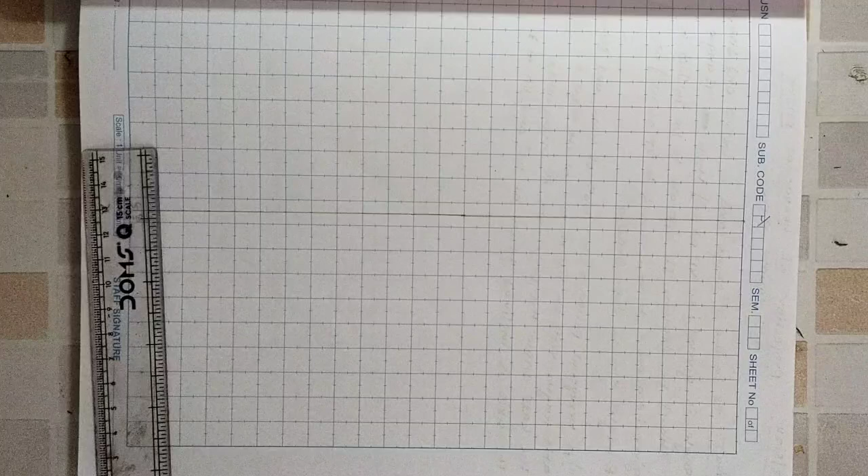So it's simple, first you have to draw a line, that is your baseline, it should be 25 mm. Let me draw it on this place, because I don't want to waste a lot of space. I got my line here properly, this is visible, right? So I'll make it dark.

Now you have to use the interior angle of the pentagon. From each corner you have to keep the protractor and take the interior angle, which is 108 degrees. Keep it properly and take 108 from this side and 108 from this side, then just draw a line. You don't have to pull a long line, just a little is enough.

Now take the compass, keep it like this, 25, perfect, cut here, cut here. Now you don't have to keep at this angle and measure 25 again, you simply bisect it like this. It's done.

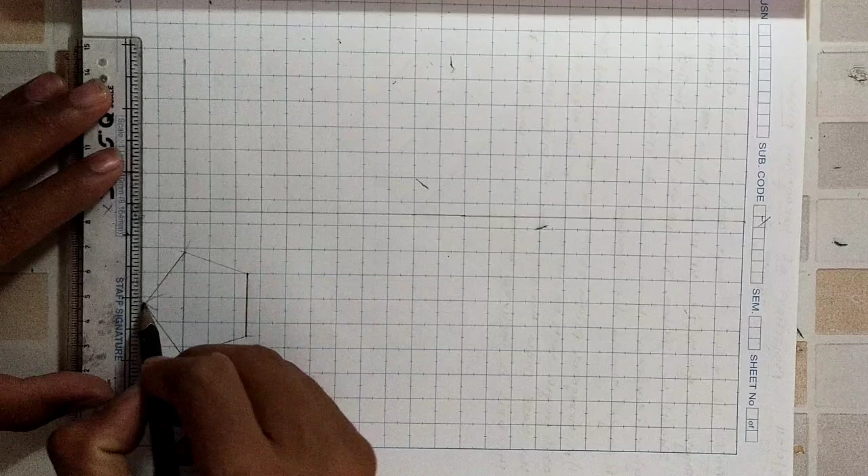See, all the lines should be straight. So from here we'll have, it's 60, right? So it will go till 1 2 3 4 5 6, till here. So this also came properly on this line itself, and this will get extended like this. This will be the top.

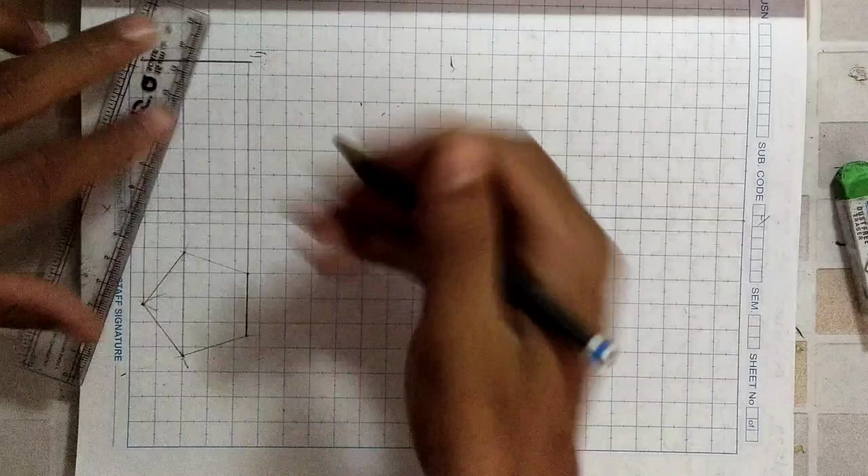This line will be dark because it's a visible edge. I won't be explaining all those things about which should be light, dark, or thin. I'll just say visible edges will be dark, edges which are not visible will be in dash-dash-dash line. This is just a projection line, it will be thin. These lines should be dark because they are visible, that's why.

Now let me start naming it. This will be A, in bracket A1, because it's a prism, so below there will be another edge. This I will keep as B and B1, C, C1. Don't name here because you have to take lines again like that, then you'll have to erase it again. A, B, C. This I will keep D, D1. This will be E, E1.

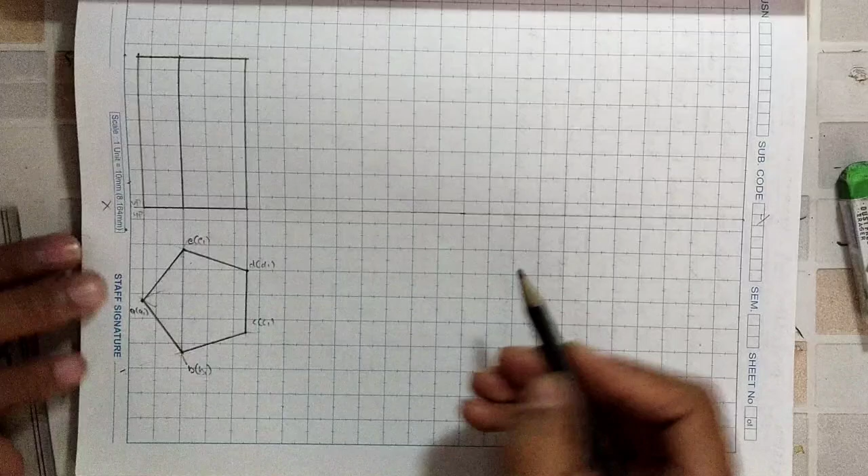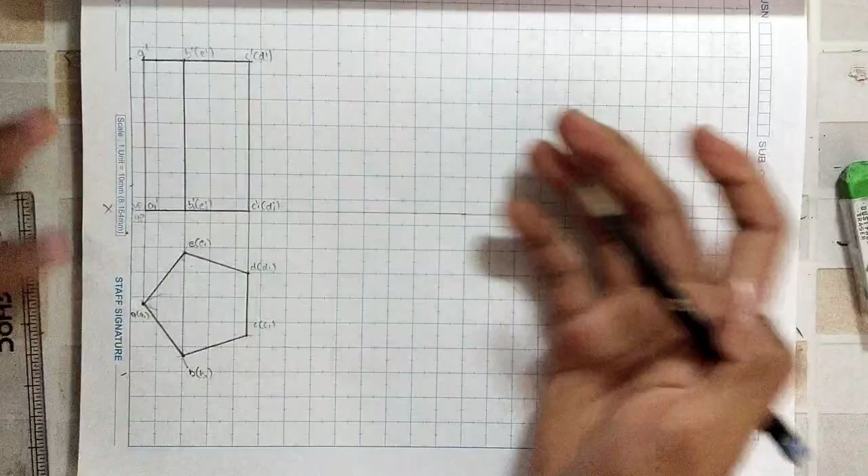So you have to place here, this is A1 dash. Above the line always dash will come, below the XY line there won't be dash. So this is my B dash, in bracket B1 dash, in bracket E1 dash, this and this edge. Here I have C dash, C1 dash, in bracket D1 dash. Here I have C dash, in bracket D dash, B dash, in bracket E dash, and here only A dash. So this part is done.

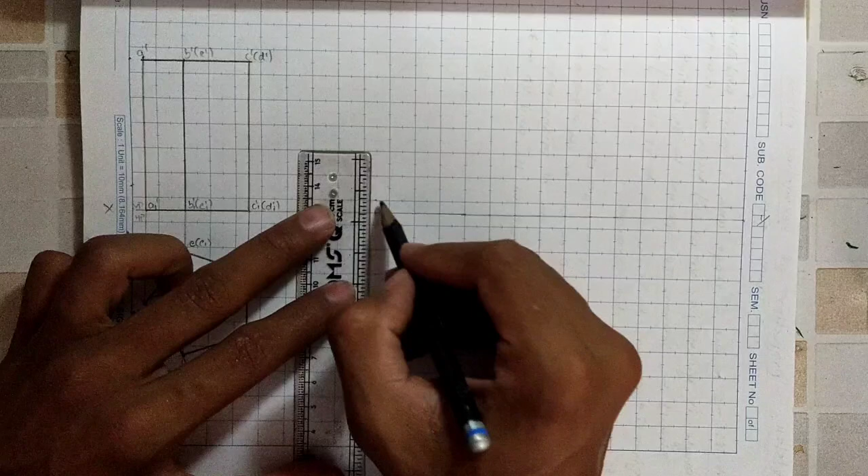Now what they said is it's inclined 40 degrees. Let us take this. I'll consider this, or let me take from here. If I put a line like this, I'll take 40 degree from here. Let me just sharpen my pencil.

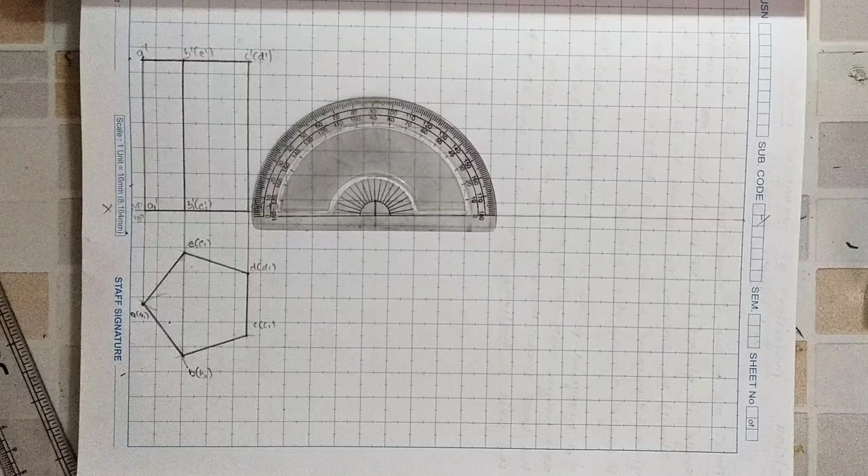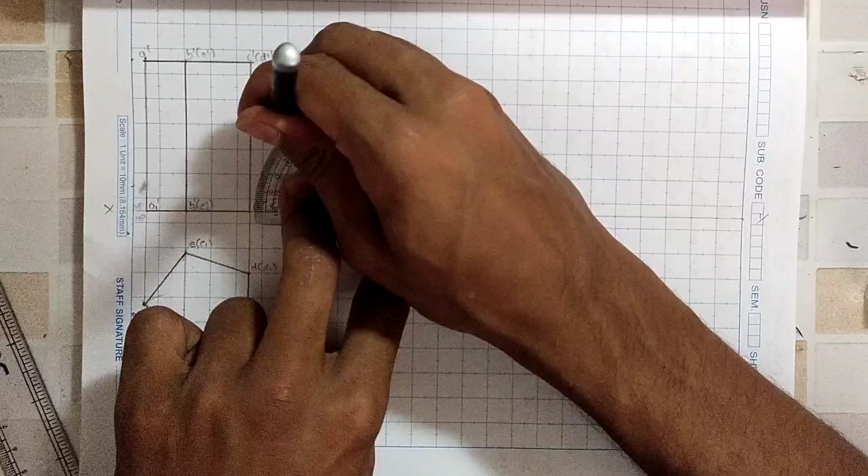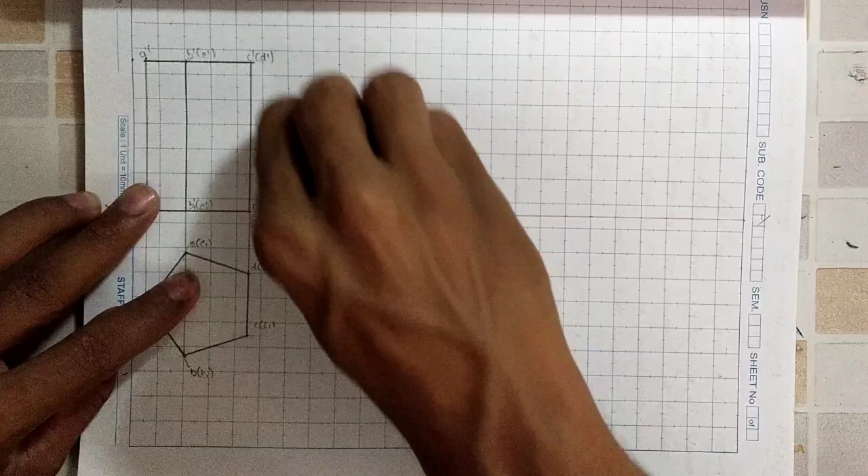Okay, so I'll keep it here at 40 degree. I'll put a thin line first. Now I'll measure this length and cut it from here. The excess I'll erase. So now this is the base which I need.

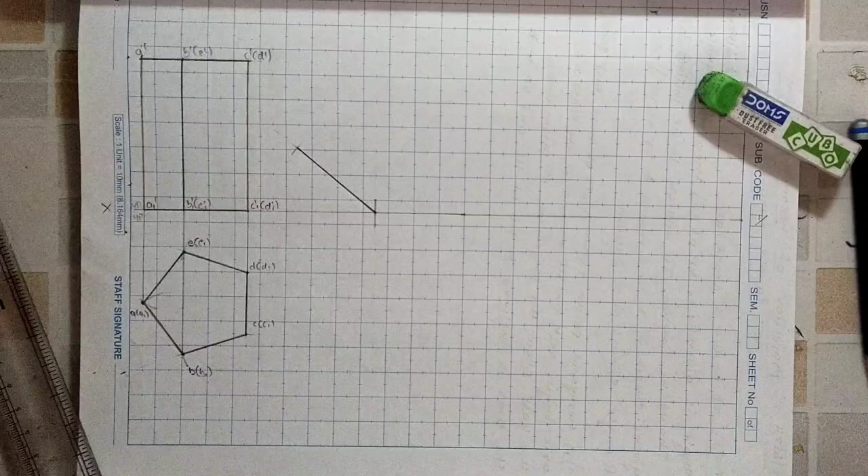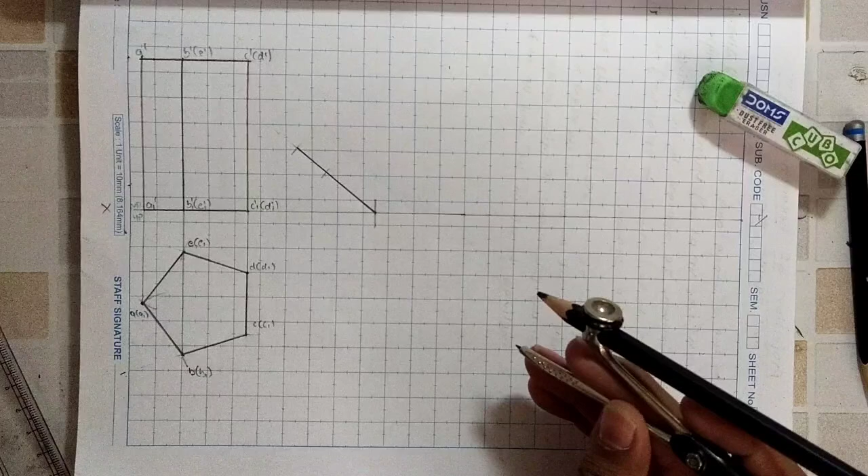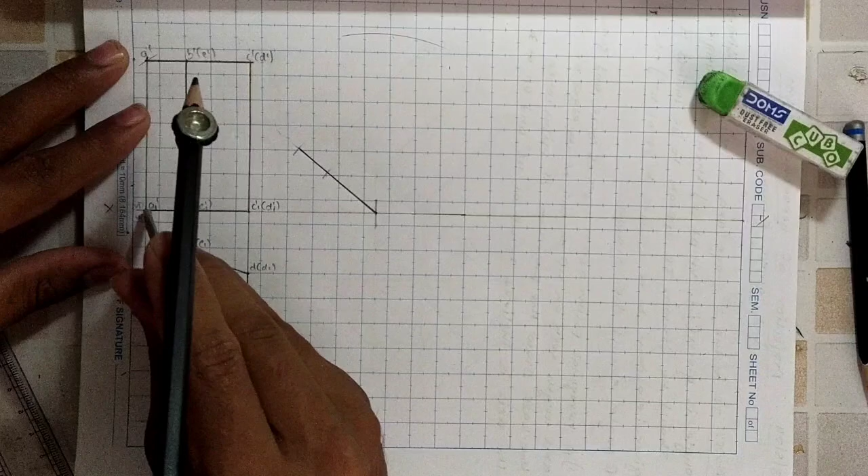Now I'll measure this and cut. Now from this point and this point I have to take 90 degrees. You can do that, or simply measure like this, put an arc like this, so this and this corner will be the same, right? And take this, put an arc like this. Coming correct, right? This is simple.

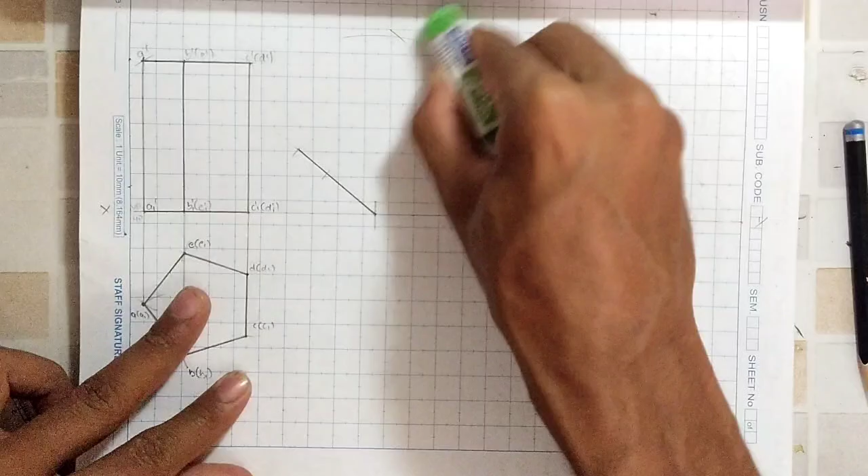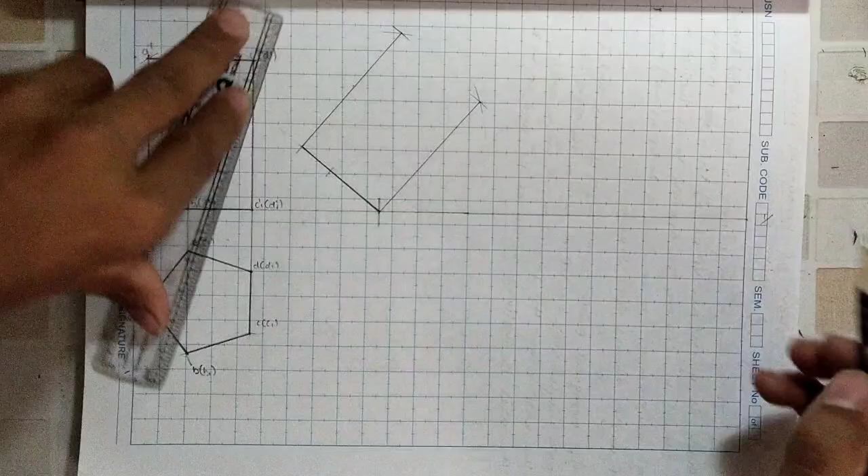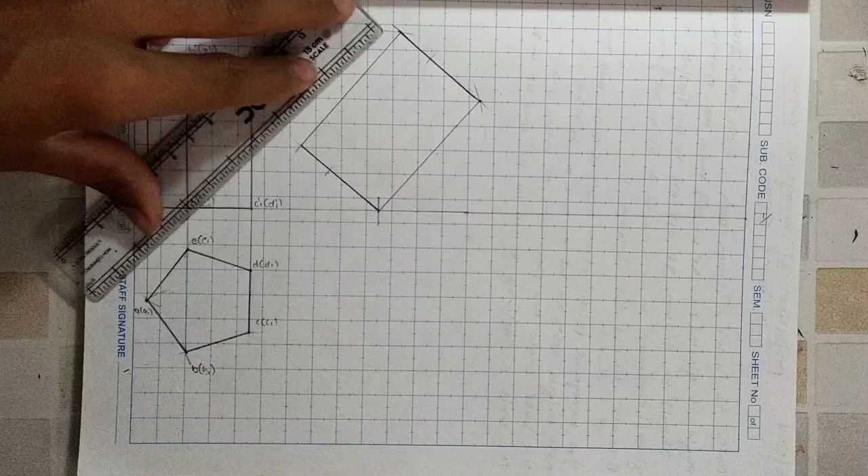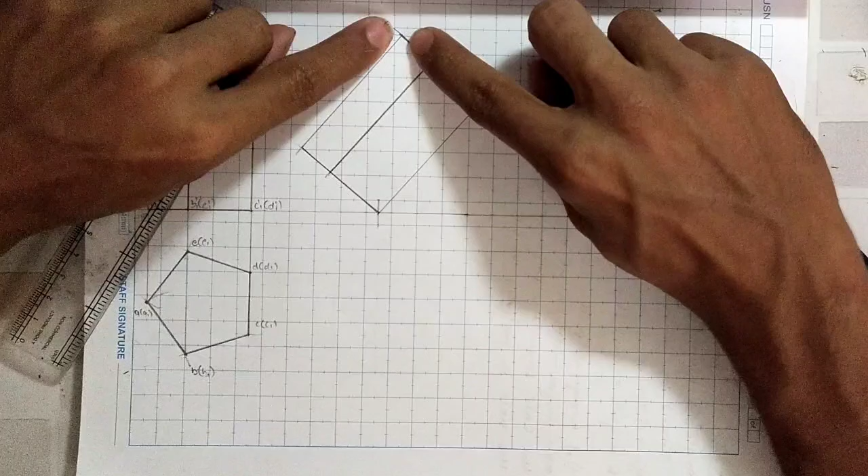So now I got my locations, to be precise it's here. It looks pretty straight itself for me. It might be a little off like that, but still it has come good. Now I'll simply take the compass again, measure this length, put it here, and as you can see I got a proper line itself. It was just a little 0.something mm difference, not a big deal.

So now I have to take a line like this, I'll take it till here. Now I'll bring a line. I extended the A line, so I'll bring the A line down.

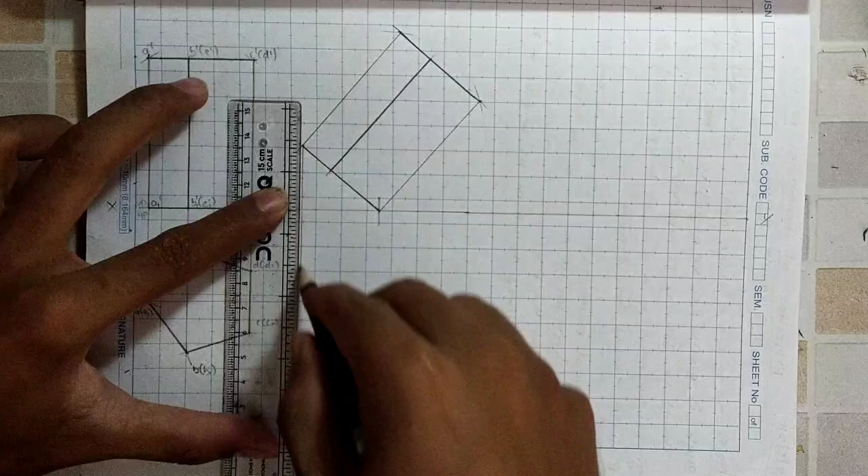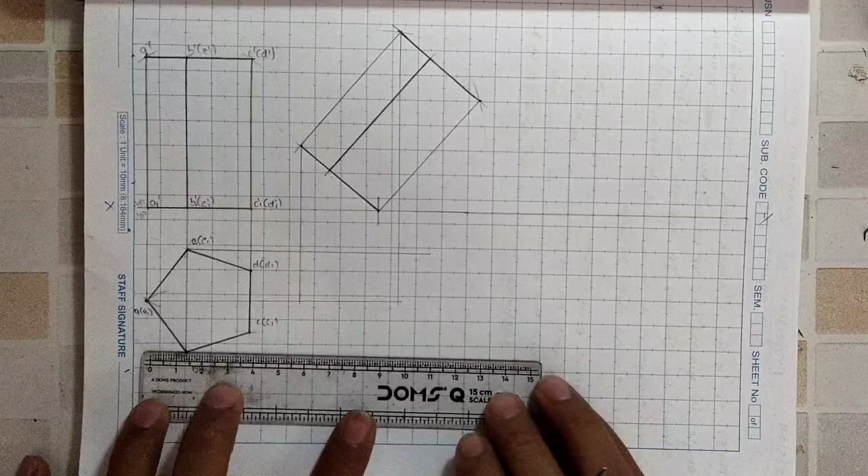Now E, right? So I know my E will be here and here. So I'll just extend that. Okay, see, it should be straight lines. So till here I'll extend it. Same goes for this, till here.

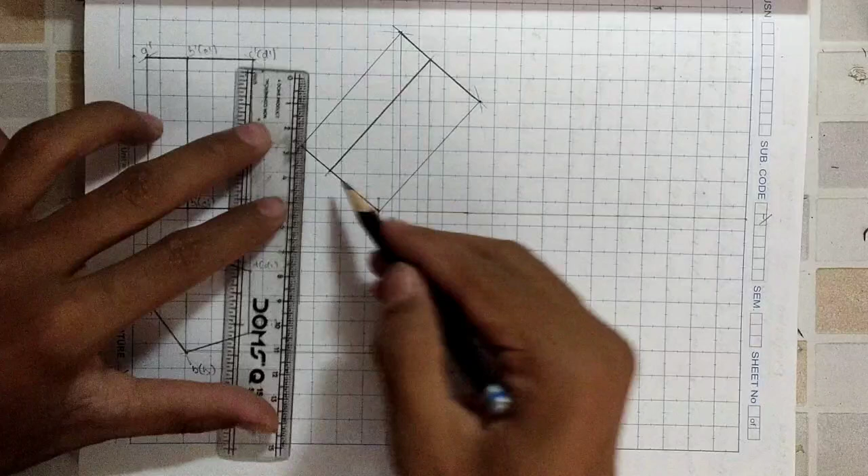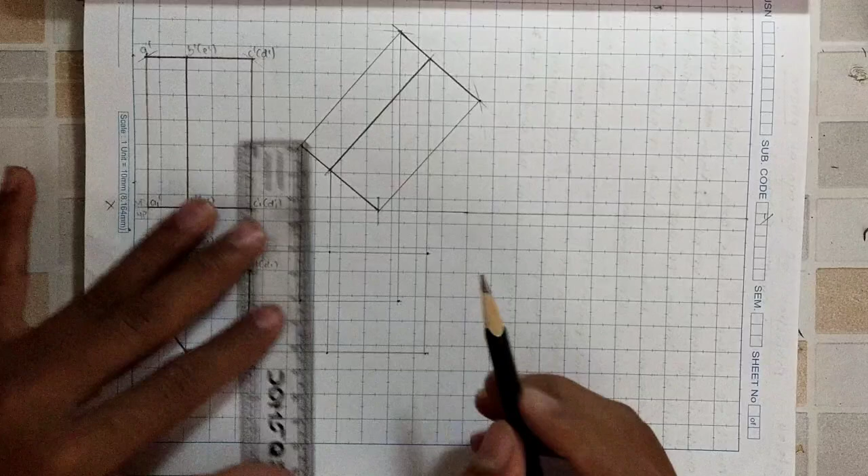Okay, now I'll bring this down, and from here I will bring this down. So see here, I got my A, this is E, and this is my B, and this is also my A, this is B, and this is E. Sorry, okay, A1, E1, B1, A, E, B. Now the remaining line I'll bring this down.

Okay, so this is exactly on this line. So till here, here, and this line also.

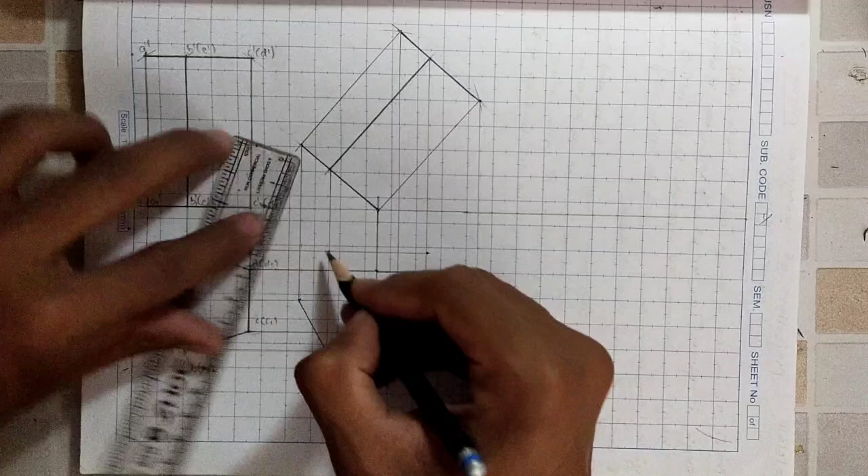Okay, done. So see now, easily I got all my points, so I just have to join it. Now see here, since you see from the top, this below edge won't be visible, right? So only these two corners are visible, but from here to here it is not visible. Even this is not visible. This is a resting edge, right? If you see from the top, it's not visible. But all this side of the pentagon, every edge is visible, because from the top you are seeing, right?

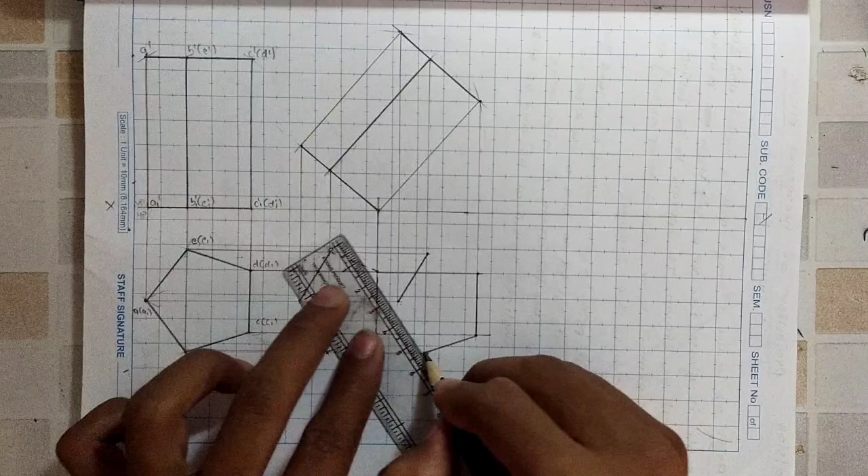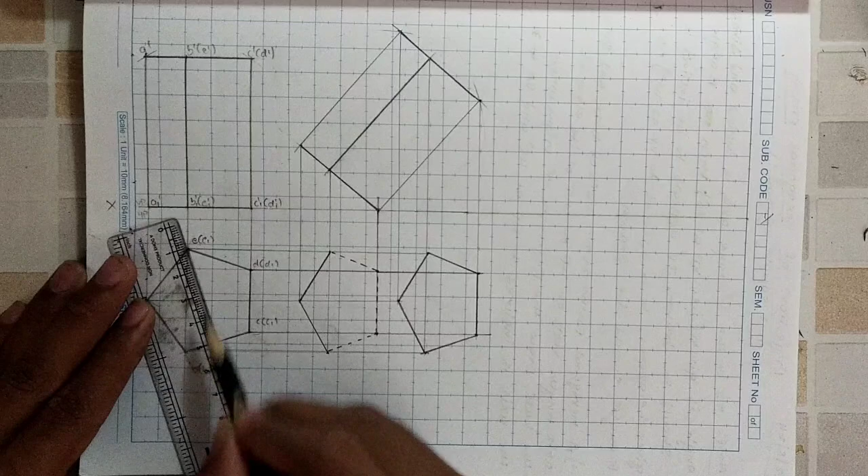Okay, so we forgot to take the center of this. Take perpendicular edges, almost. So it's very simple to take perpendicular edges. What you have to do is just keep this line of the scale on this line straight and move until it comes to this corner. The same thing I will do here. I will keep this here and adjust.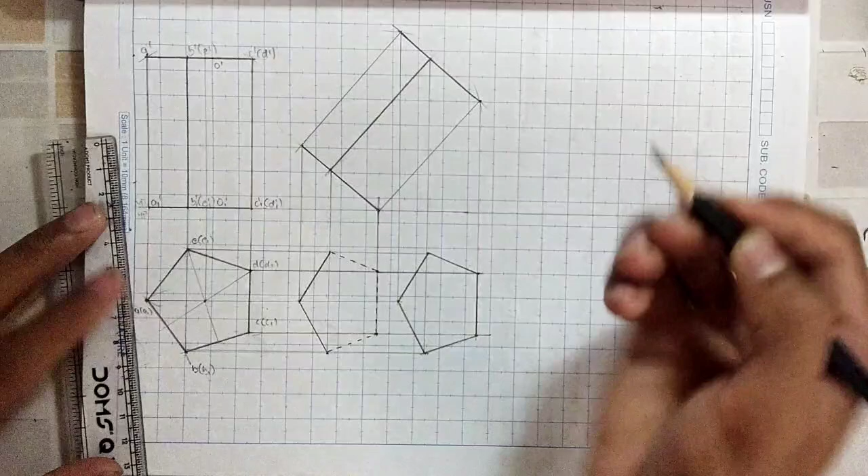Okay, the center is like this. So I will say here O1 dash, here O dash. Then I will simply measure this length, put it like this, and I will simply pull it down. I will get it.

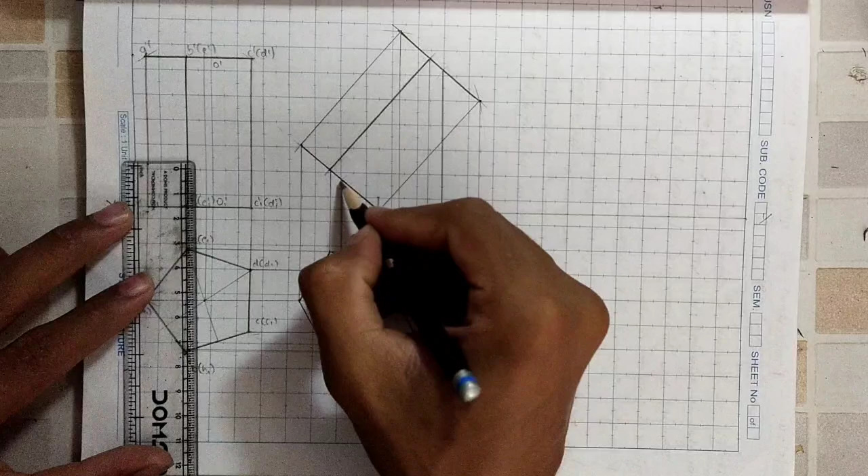So I will take here itself. It's almost on this line itself. Okay, see here I got it slightly off, and here I got it exactly on that line, right? So that's the difference. So now see here, this to this will be visible, same edge to same edge.

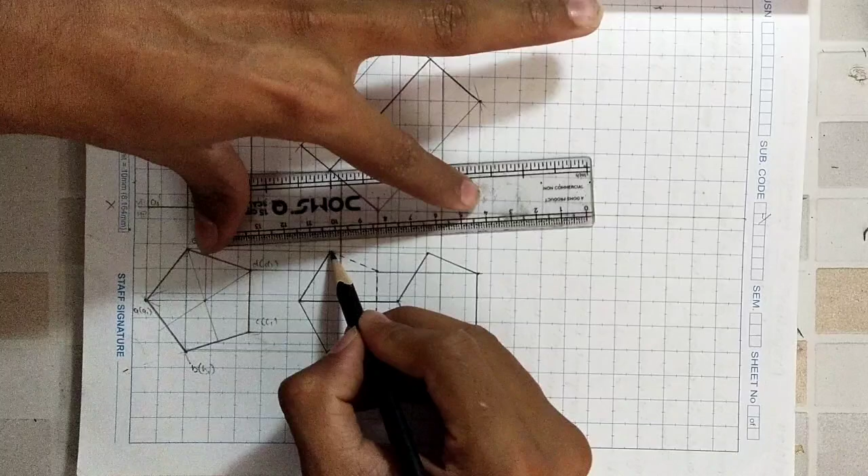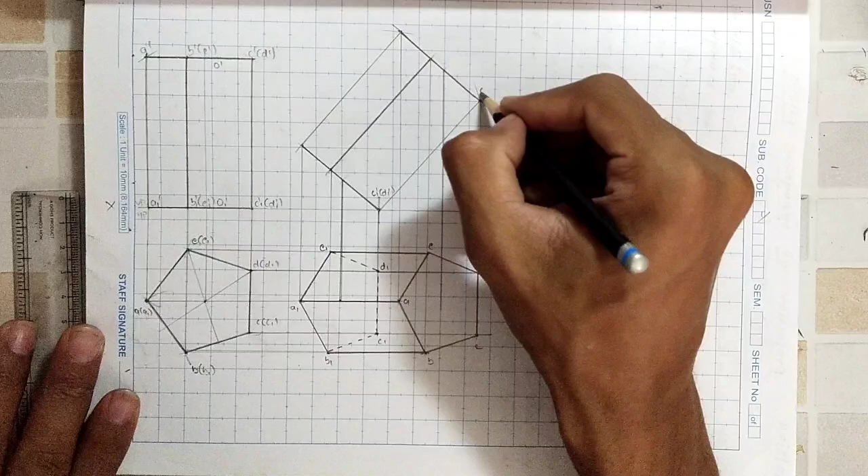Okay, done. So this was my A1, B1, C1, ABC. This is my D1, and this is my E1. So this is my A, B, C, D, E. So let me name it here also. So this was my C1 dash, D1 dash. This was my O1 dash, and this was B1 dash, E1 dash, and this was A1 dash, A dash, B1 dash, E1 dash. This is only O dash.

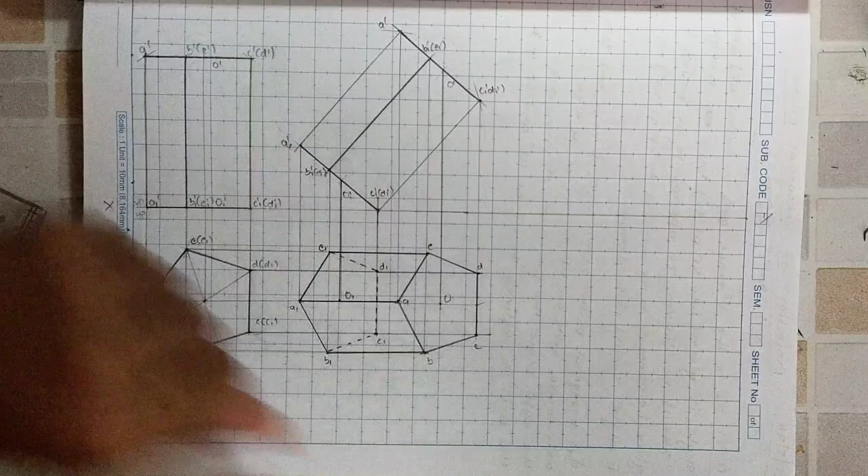Done. So now what I have to do? Okay, I forgot to put this O here. This is O1 here. Now from this to this, I have to shift right by 30 degrees. Okay, so let me take from the last. If I take 30 from here, let me see if I am getting the proper angle.

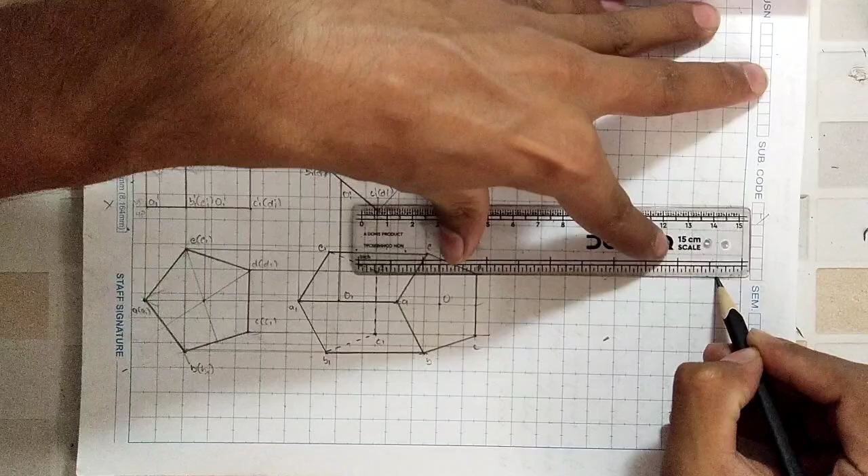So it will be like this. It will be 2 down. So what I will do, I will come down. I will consider this point and then take 30 from here. Why I am doing this is because I cannot get here now, so I have to come till here, so it will intersect with this part of the portion. So I simply put one line like this.

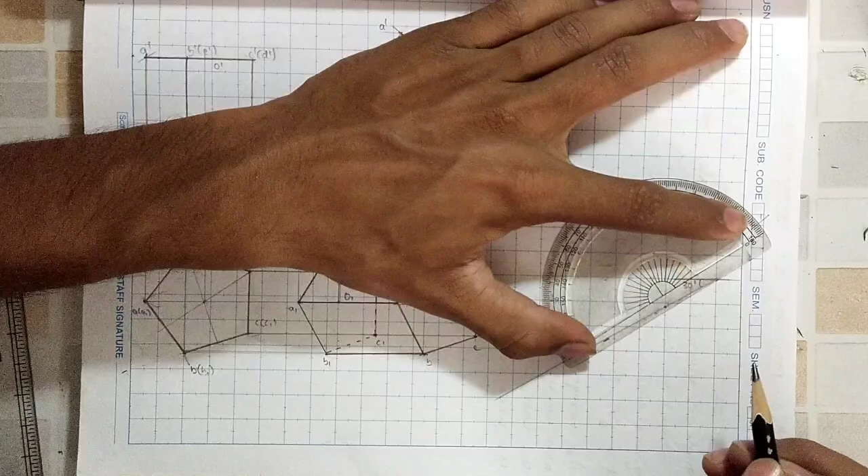Okay, so from here it was 30, and then I will mark 30 degrees like this. Okay, then I will consider a point. Let me suppose consider this point. So now this point over here is this point. So now what I will do, I will keep my protractor properly exactly on the line and mark 90 degrees, 70, 80, this is 90.

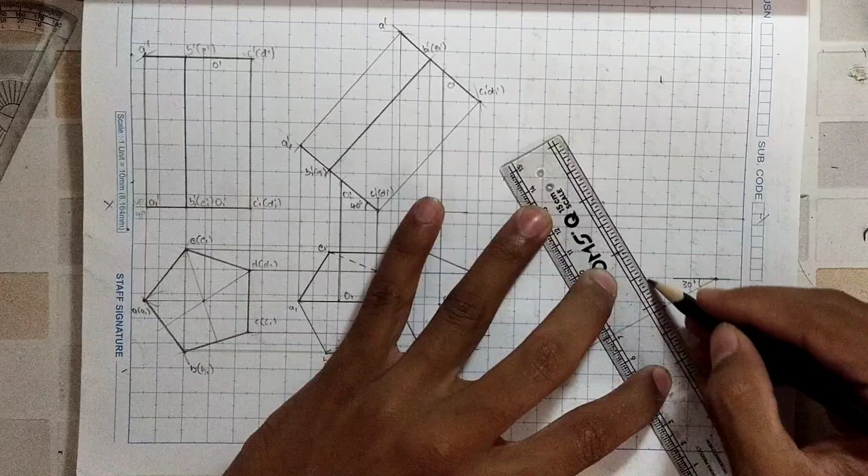Okay, so I got one perfect 90 degree line. So now what I have to do is measure from here to here. I got my D, then I got my A. Okay, let me just measure once again. The compass was loose.

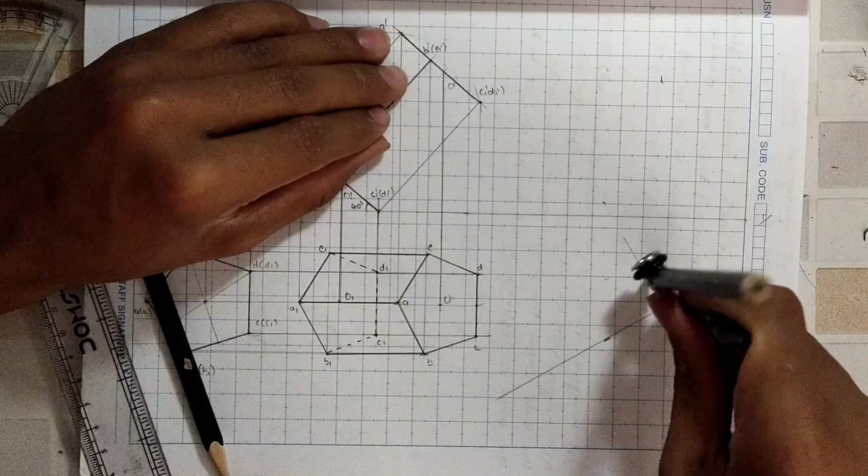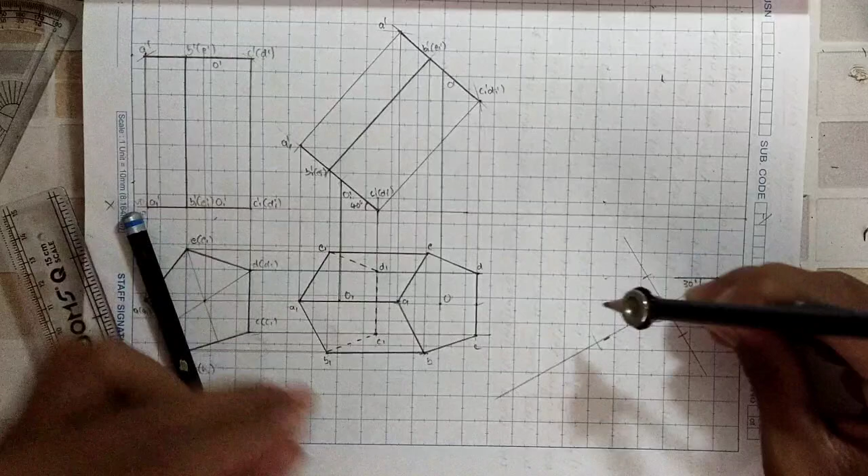Correct, this side, correct. So now again, like I explained previously: O, this point to A, and this point to this also I want. Then this point to this O, this point to this A. Okay, so now see here, I have D, C, O, A.

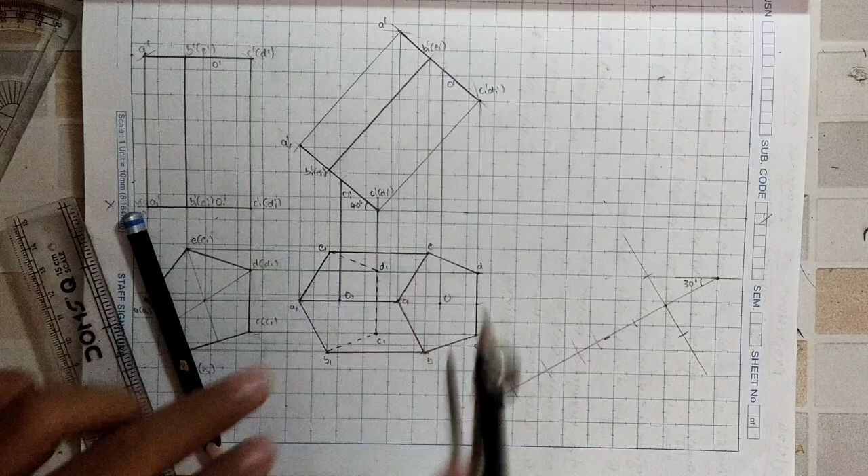So around I can take this and this point. How? I'll just measure from B to A. Okay, so this and this points are the same. So this is my A, right? I'll put one line like this. I'll put one line like this.

Now I'll measure like this, or better let me do it from this. It will give me a proper edge. So if I keep from here, I'll cut here. If I keep from here, I'll cut here.

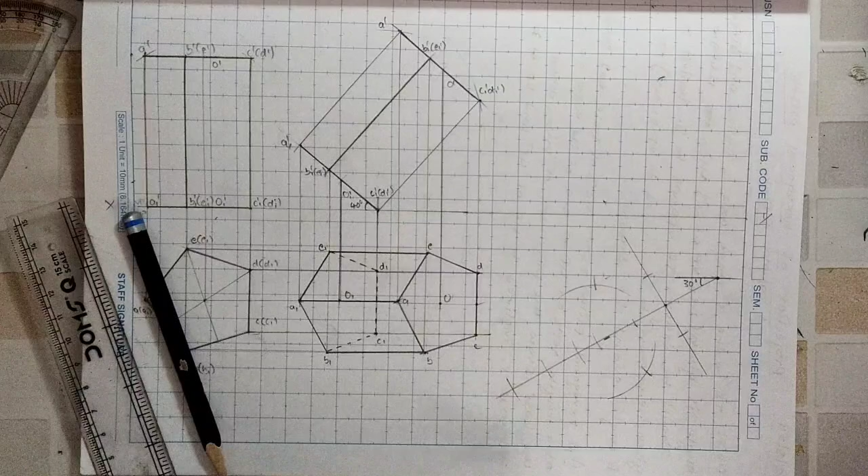Now let me join it. I'm sorry if my hair is coming in the video. I just have to put straight lines, and anyhow it's visible for you guys. So see here, a proper pentagon has come.

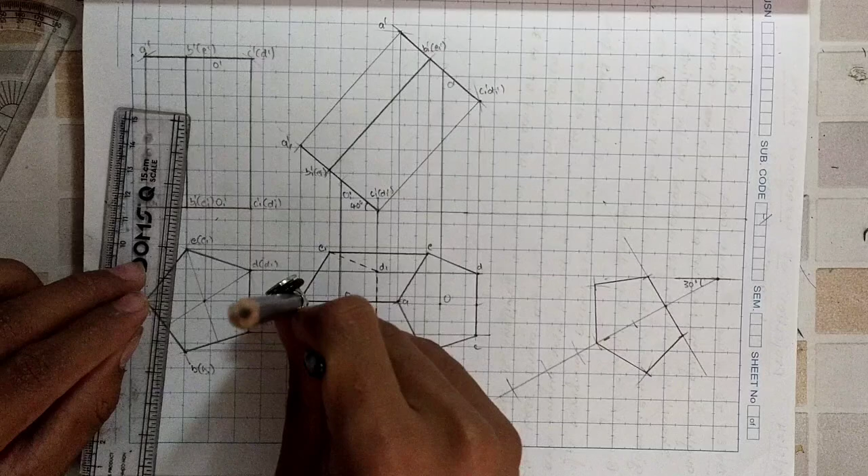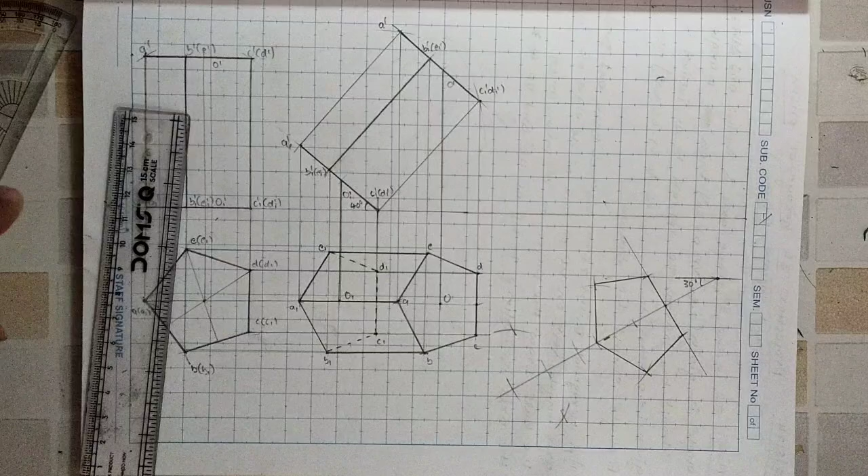Now I have to do the same. Now, a simple easy thing, I'll just again measure from A to B. So it's like this, then it's like this. Now I'll measure this length. See, you just have to obtain some common points so that you can just intersect. Okay, now see how my work will get a lot easier. So I got this point, so this is here.

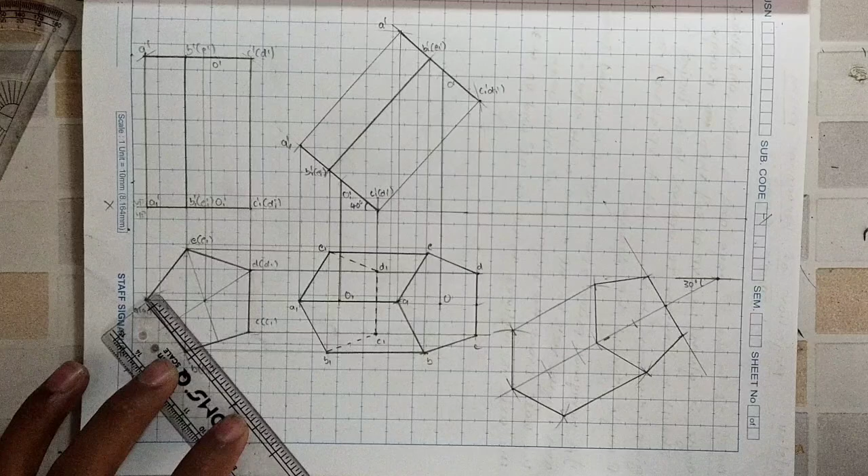Okay, now I don't know this and this, but it's not a problem. I have this, right? So I'll just put some straight lines and then cut. See here, I have this point. Okay, then I have this. So now this will intersect.

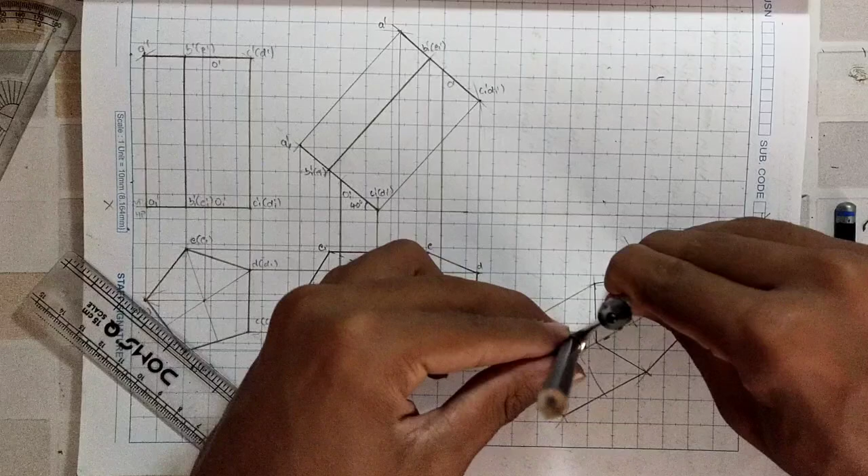I'll do that itself. So what I'll do, I'll measure from here to here. I'll keep here some straight, keep here little straight. Then what I'll do, I'll keep here and measure this. This is the point it was.

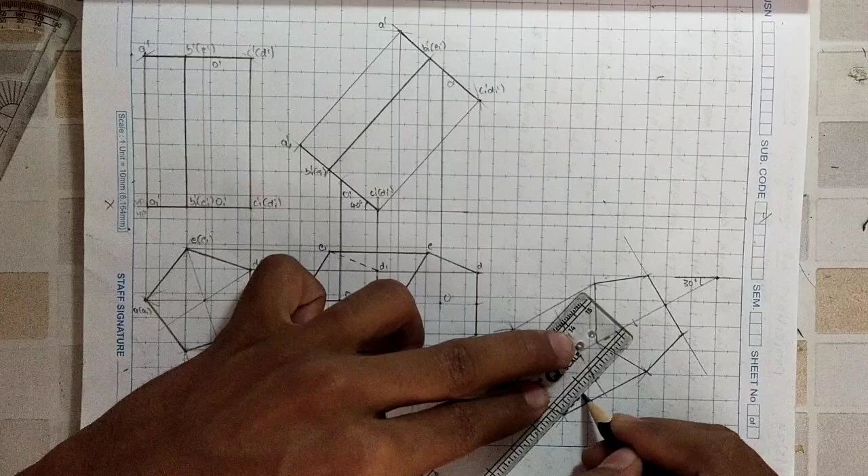Then from here. Okay, then I'll join this. So these all are dotted lines. So yeah, dotted or dash dash dash dash, all are same. Hidden lines we will say. Okay, that's better. So see here, I got it. This some extra lines.

Okay, so I forgot to mention here that these all are hidden lines from here. These lines, because it's not visible. Let me just do the same. It's hidden lines.

Done. Now I'll name this. This is A1, B1, C1, D1 and E1.

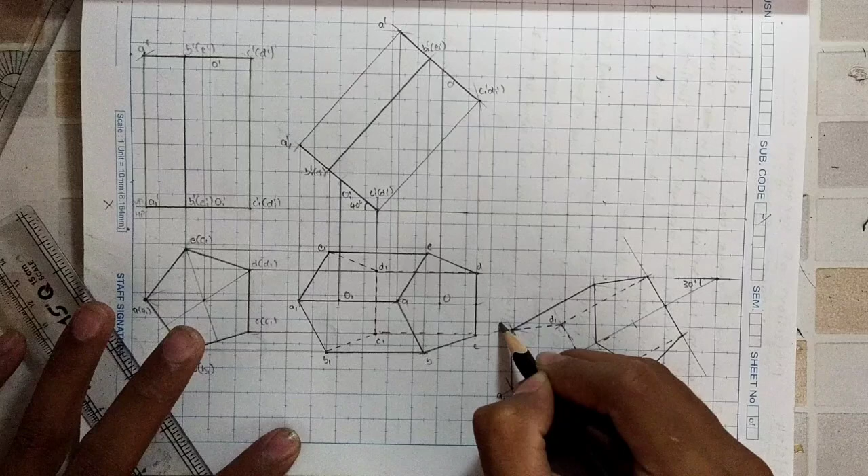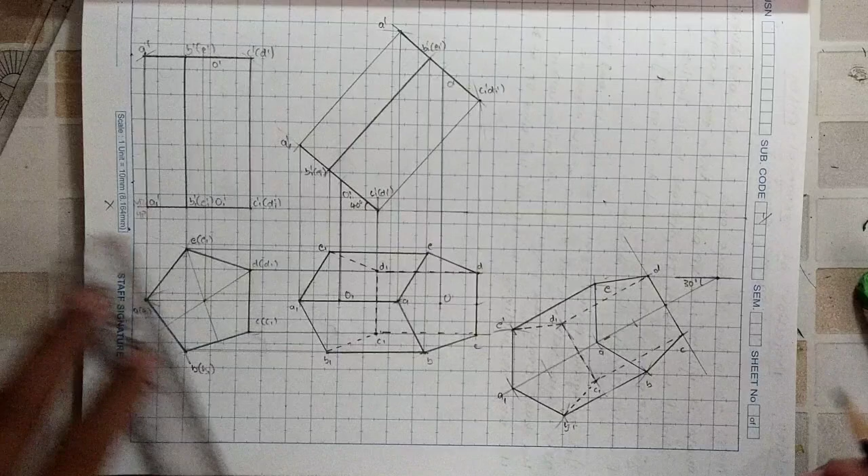So this will be my A, B, C, D. I'll write here like E. Oh sorry, this is not my D. This is D. Okay, so now first I'll put lines from here.

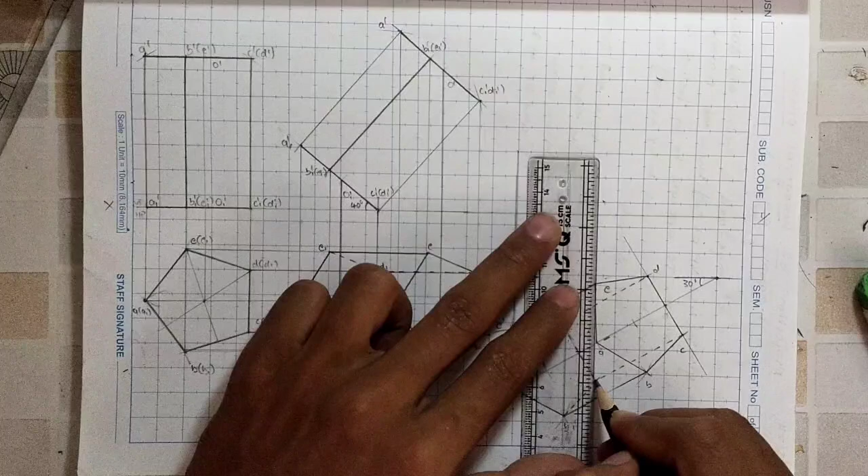A will come till here and stop. Then E we have till here, same. It's almost beside each other. Okay, this is also exactly almost on the line. So it will come here, and D is here. D is in the base. C is also till the base. So see here, this is my resting base which I have got here.

Then I have to just put lines from here like this. Okay, oh it came cross, sorry. Why did it come cross?

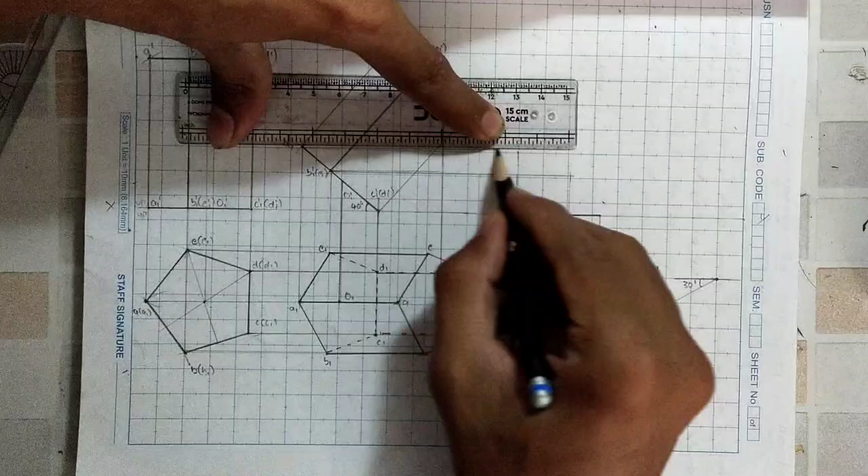Perfect. So this is for A. It's a little upright. If I do like this, so see here, it will come like that. Why? Because it's almost a straight line. It's too thin to be visible, right? But from here it will be proper.

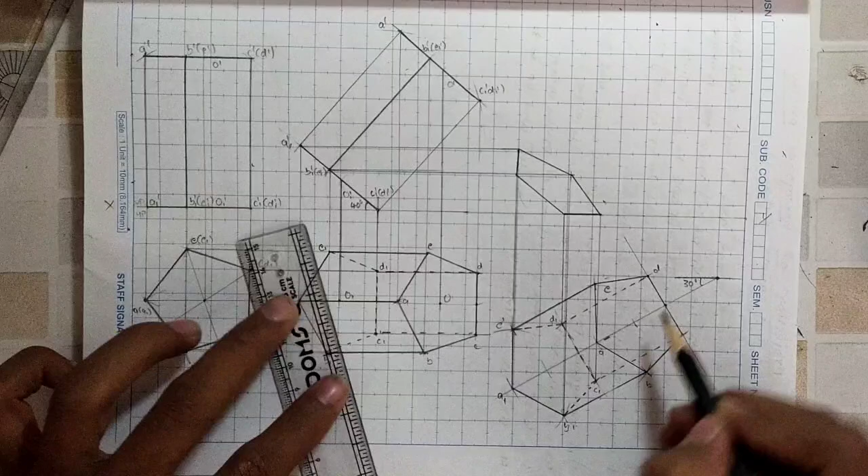You got the pentagon. Okay, the same thing should come up also now. Okay, so now let me put lines. So from CD, I'll start from CD. Okay, it will come here. This will also rest till here.

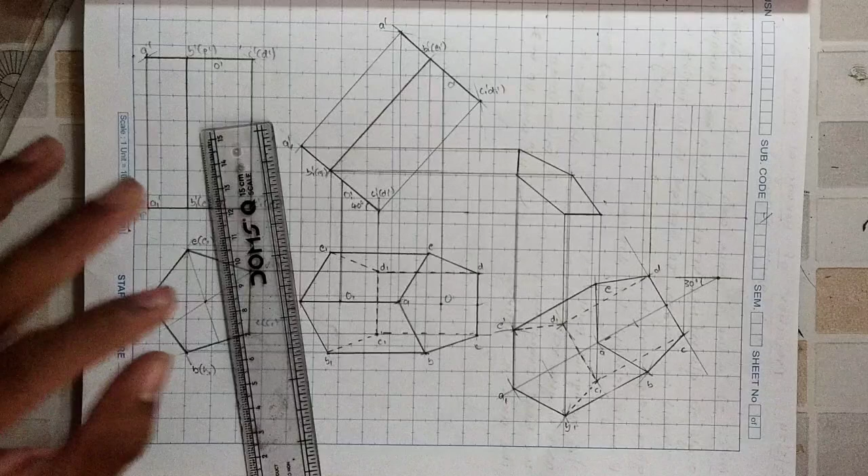See, usually you have to put straight lines from each one, from two top and from each line till here, end. Okay, but that might look a bit ugly. So I am directly doing it neat. Why? Because I don't have to again erase and waste my time in exam. You will have 3 hours, but you have to do 5 sums, right? So it will take a lot of time. You have to make each sum like 30 minutes or 45 minutes.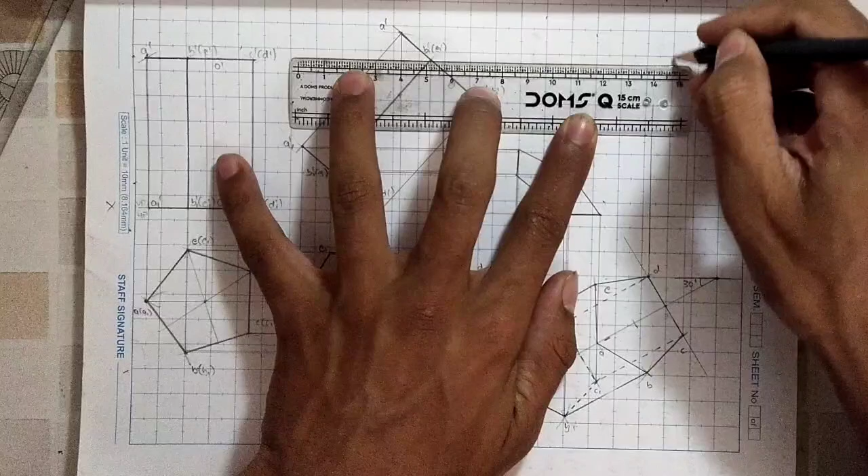Okay, so now I got C and D. It will come in the same line. Now I have to do for B and E. So see here, B and E. So B comes till here. So what I will do, simply imagine it. So I will take till here itself. Okay, so now I will extend the B

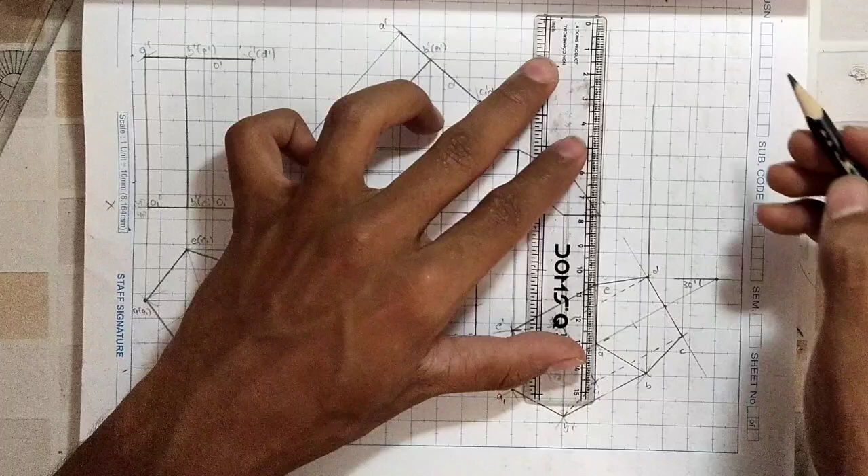till here, then E till here. Okay, so where is my A? A is exactly on this line. Sorry, it came a bit cross. Okay, let me erase and do it properly.

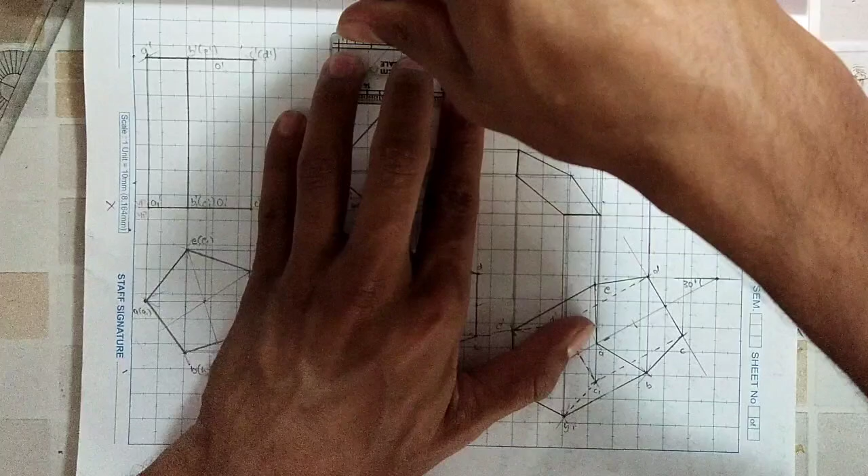Okay, so I got in this 1 2 3 4 5. Now see here, here this inside was not visible. Since here it is visible, so here this won't be visible. Okay, understood? And this thing you have to understand practically by using one pentagonal prism object.

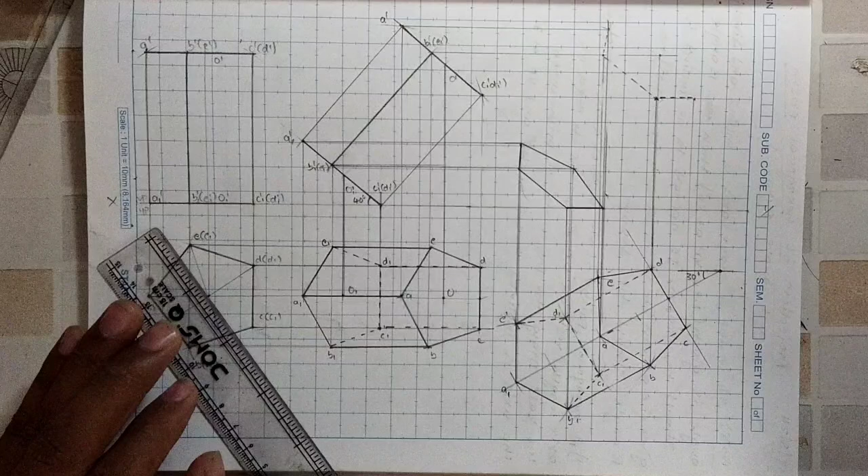Okay, so this is not visible, but this should be visible, I guess. C D B E. So this was, it should come a little across like that. Where is B? B is this. Okay, so my D was a little bit left side.

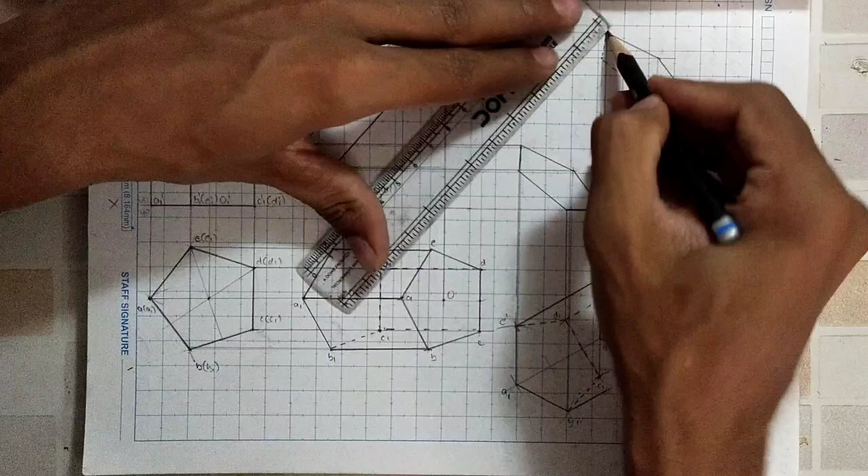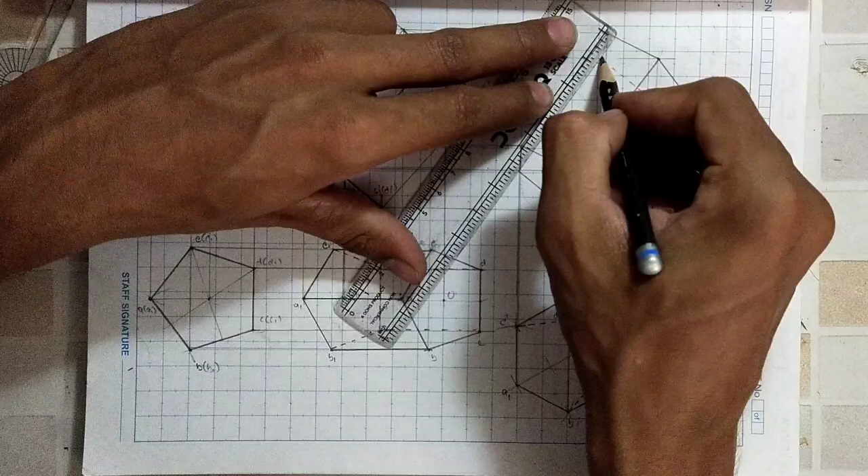Anyways, let me just join it. It has come proper itself. Now see here, this to this, the border is always thick. Now the inside this, now main thing is this end to this, so this edge is visible, okay, but from here to here it's not visible. Then from here to here it's not visible. Always remember that this base will always be visible, okay.

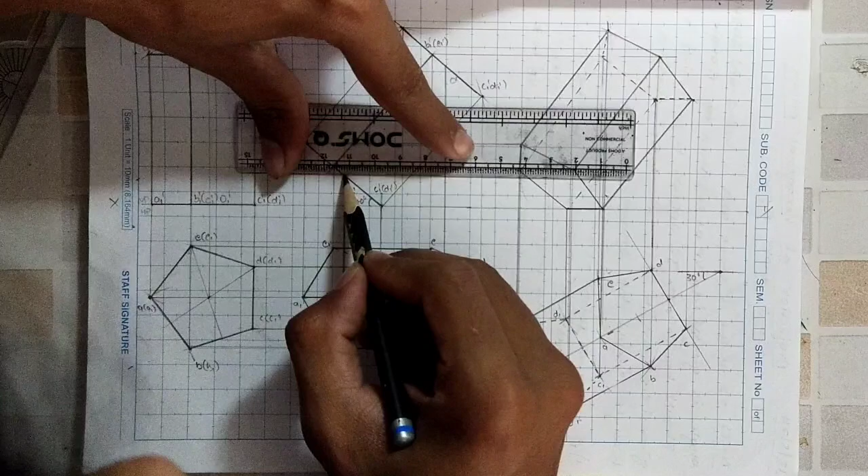Since here a small slight difference happened, so it's looking a bit cross like that, so we have to take lines from here also. Okay, so to define my center of this, okay, so final step done. I just have to do naming, that's it.

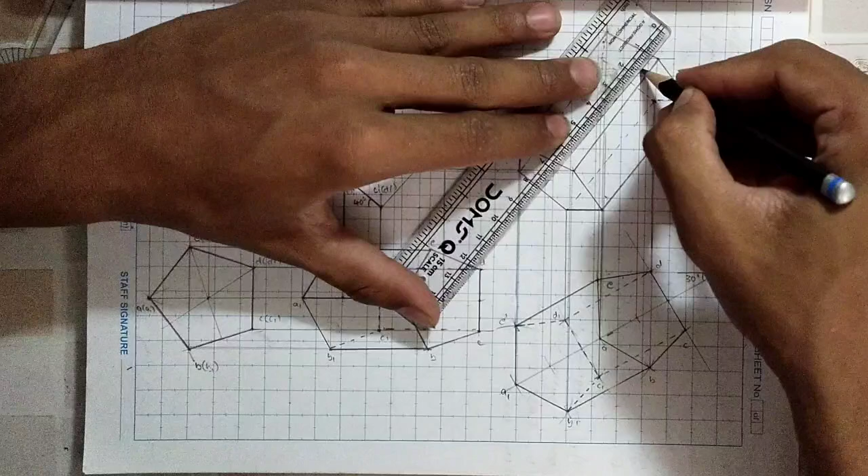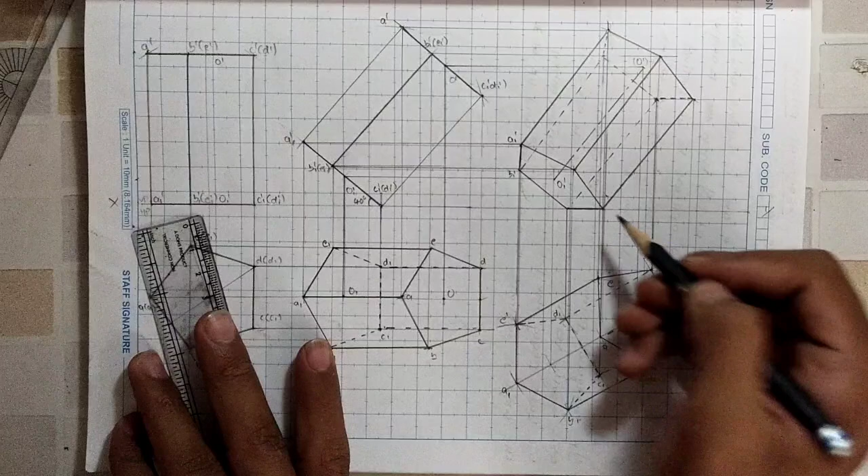So this was my O1 dash, this is my O dash but in bracket. So let me start. This is A1 dash, B1 dash, AB, okay. Oh, this is CD, so this is my B, right? Sorry, this is my B and this is E, so this is my E1 dash, B1 dash, D1 dash, C1 dash. So A dash, B dash, C dash, D dash, E dash, over.

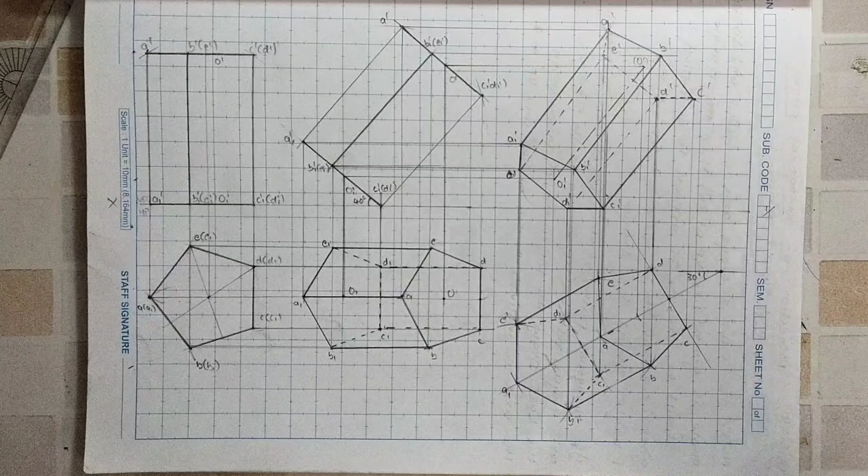So it was simple, quite enough. Don't forget to mention the scale, dimension, VP HP, X, Y, and which is dark, which is light. So it was as simple as this. I'll be anyhow posting a clear picture at the end. Now you will be getting an exact clear picture of this. So I hope you understood. You can ask me your doubts in the comments.